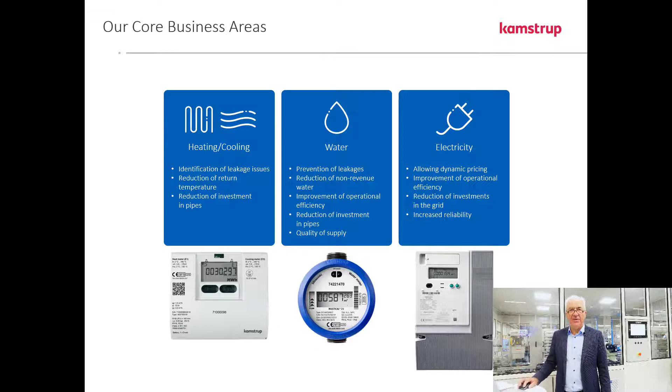I will in a moment briefly show our solution. A quick look at our locations: the Kamstrup solutions are sold to around 80 countries around the world. We are not global yet, but we are working on it, and we have reached 80 countries by now.

Out of these, we have our own offices in 23 locations in Europe, in the US, and also here in Asia, where we have offices in China, India, and Kuala Lumpur, with Kuala Lumpur being what we call a regional office for the Asia Pacific region. In all the remaining countries, we work with distributors.

You may, to a high extent, regard Kamstrup as a technology-based and very innovative company. We are altogether around 1,500 people, and we put a very strong effort into product development and innovation. I can mention that more than 300 people, over 20% of our colleagues, are working on innovation and R&D around the clock. This really plays a big role for us.

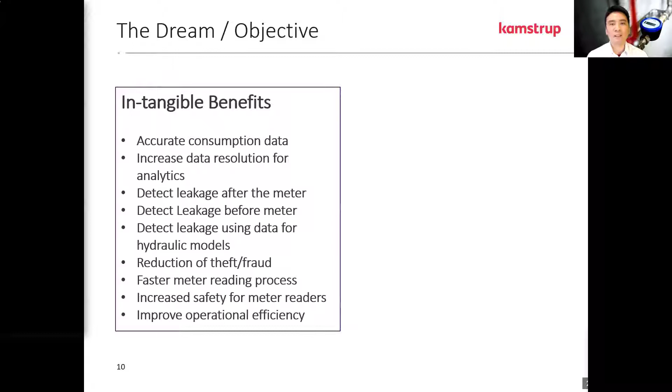It simply means that we can't measure the benefits upfront. So the approach for many utilities today is to try new things: put a module on a mechanical meter and have it transmit data once a day, or get hourly data and see what we do with it, or try a low-cost static design. The idea here is to manage cost. We want to go smart, and in order for it to pay for itself, it has to be low cost.

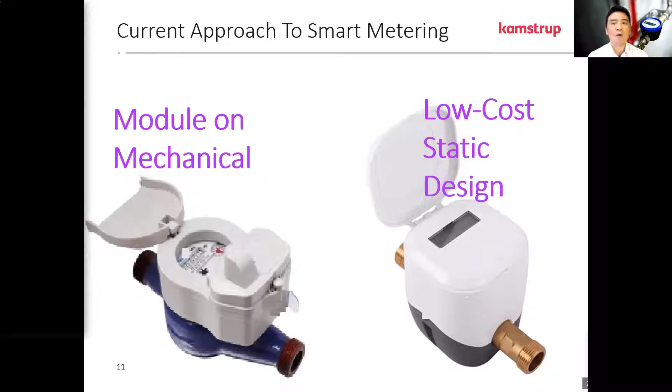That is the approach. However, my suggestion is different. We need an approach where we let smart metering pay for itself. Instead of limiting ourselves to a low technology or less reliable approach, let's use something more reliable, but have it pay for itself first. So how do we do it?

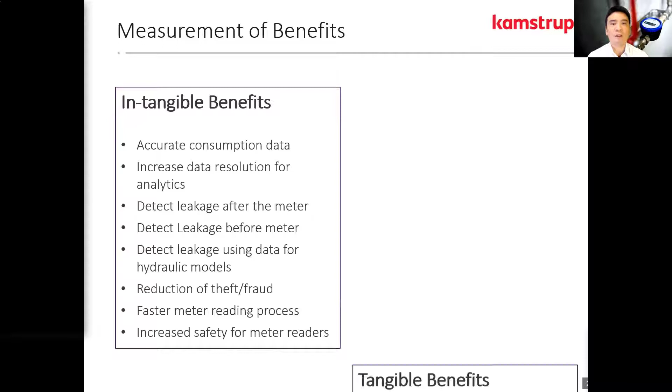Earlier I talked about the intangible benefit. Now let's focus on the tangible benefits first, meaning billing revenue increase. If we replace smart meters, we know workforce will be reduced, but that's not our key topic here. We are looking at the meter itself, so billing revenue increase.

Under billing revenue increase we have two segments. The first is non-measurable billing revenue increase, which has to do with elimination of estimated reads and prevention of meter tampering, but we don't know how much of that is happening, so we can't measure it upfront. But what we can measure upfront is, for example, replacement of stuck meters. If the meter is clearly stuck, you replace it and then look at the revenues, and you can tell how much revenue you've gained, or badly deteriorated meters, or resizing meters that are wrongly sized.

So let's focus on measurable billing revenue increase. What utilities have been doing to increase or protect revenue is to replace meters. This is done by all utilities. You have an existing meter, and as the accuracy falls and error increases, you replace the meter, and then it falls again, and you replace it again.

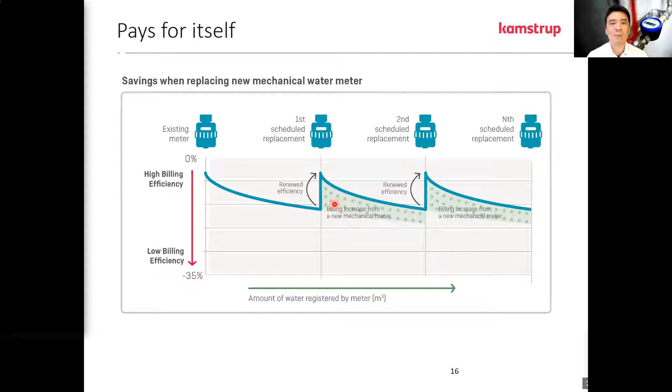This increase in error, or drop in efficiency, is mainly because of the deterioration of the mechanical component. As you use it, it fails. That's true of all mechanical components, not just meters alone, regardless of brand, type, and make of the meter.

So where does this information come from? You can search it all over, it's all over the internet. In this case I have two examples. The first is the performance analysis of aging single jet water meters, and then there's another article from Uganda touching on piston meters, the ones more frequently used in Malaysia, for example.

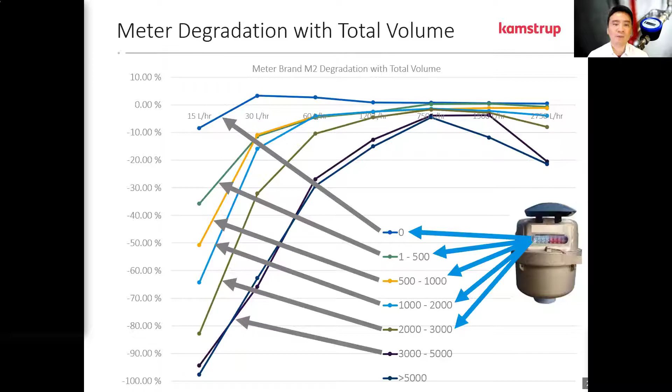You can see this is a new meter at zero, and this is a meter just started being used, about 1 to 500 meter cube, and so on. As the mileage increases, the worse it becomes. When I say worse, what do I mean?

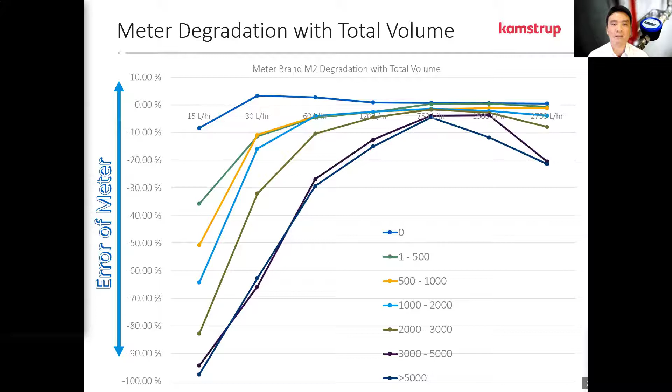If you look at the left side of the graph, that's the error, the percentage error on the meter. At the very bottom you see about 100% - negative 100% is hardly reading anything at that flow rate. When I say flow rate, look at the left and right chart's x-axis: on the left side you have 15 liters per hour, for example, that's the low flow for this meter. It's an R50 meter, so you can see how the efficiency really impacts the low flow of the meter.

So it makes even less sense if you buy a high dynamic ratio mechanical meter. Like if you go for R400 or R800, it hardly makes any sense.

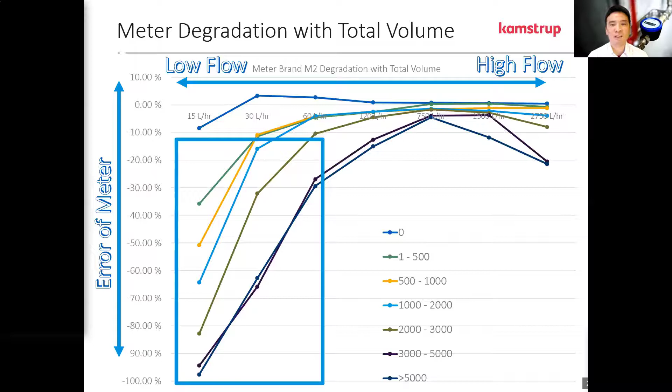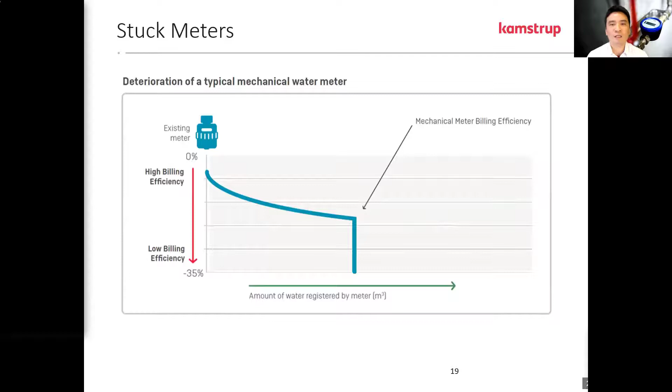You're lucky if the meter deteriorates normally. When I say lucky, I mean it could be worse - it could go from a certain percentage all the way down to negative 100. And these are stuck meters. I don't need a research paper to back this up - talk to any utility, they can tell you all about stuck meters. It happens all the time, and it has a lot to do with water quality in this case.

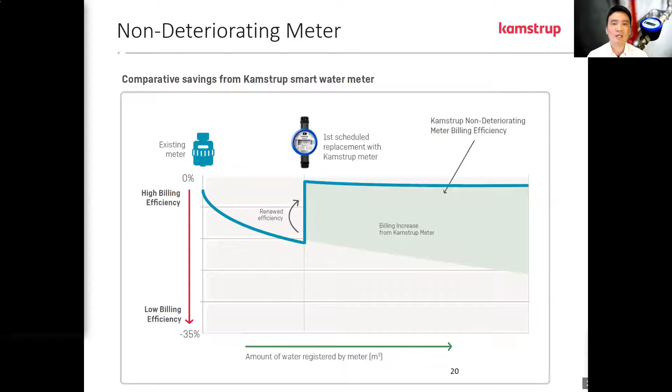Now, the idea here is to put in a non-deteriorating meter. If I replace a meter and it stays accurate throughout its lifetime, what's that lifetime? In Kamstrup's case, it would be 16 years. How do I reflect that compared with a mechanical meter? When I replace a mechanical meter, based on this particular research, the savings would be about 5%.

Now, if I can put in a non-deteriorating meter that stays accurate across the board, what does that mean? It means I replace upfront with one non-deteriorating meter, and then I don't have to replace any more until it dies - in our case, 16 years. So the savings just on the billing revenue protection side is 15%.

We're not suddenly jumping the bill and having customers go crazy about why it's so high. It's not that - we're simply providing a meter that does not deteriorate, that's all. It's not going to give you some fictitiously high reading. It's simply protecting your revenue over time, so you don't have to replace it afterwards.

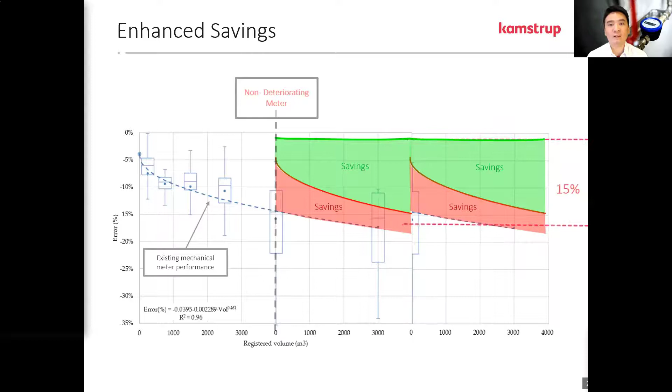And how do we know this is true? Well, if you look at Kamstrup's experience and application in Europe, many European countries require you to revalidate the meter after a number of years - in this case, about 6 to 7 years. There's this particular case where we have 1,308 meters being tested from the field.

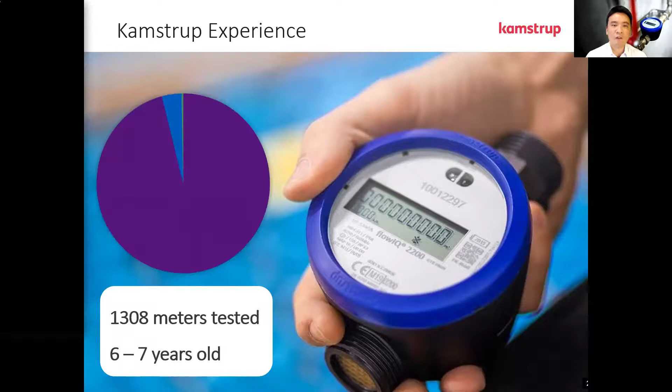This is from the customer - we are accredited to test meters, and they send it back to us for re-verification as required by law. So we retest it, and after those number of years, 96% falls within plus minus 2% error.

This is new meter territory - brand new, better than new in some cases, because our low flow is also plus minus 2. About 3.7% is double that, plus minus 4% error, which is acceptable overall. And if you look further, only 0.3% is out of spec, outside the plus minus 4%. I'm not talking about negative 100% like mechanical meters - it's just outside the plus minus 4%.

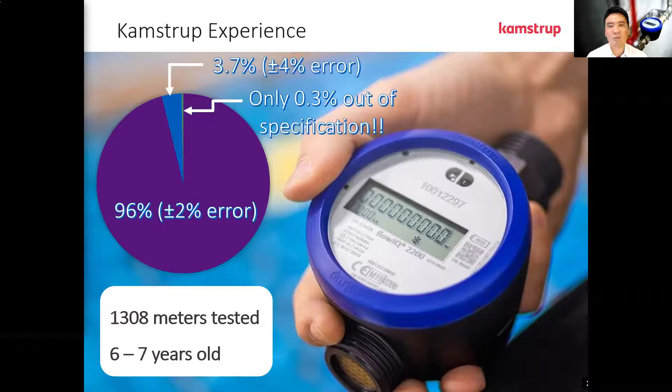So generally we say that our meters will last and be accurate for the whole 16 years of the battery life. We have experience on that.

So the enhanced savings - how we get a smart meter to pay for itself - is that first, you put in a smart meter that is robust, that can last the life on field, and doesn't have to be replaced over time, and then you have this high level of billing revenue protection. So that pays for itself. And then we can have meaningful, tangible and intangible benefits.

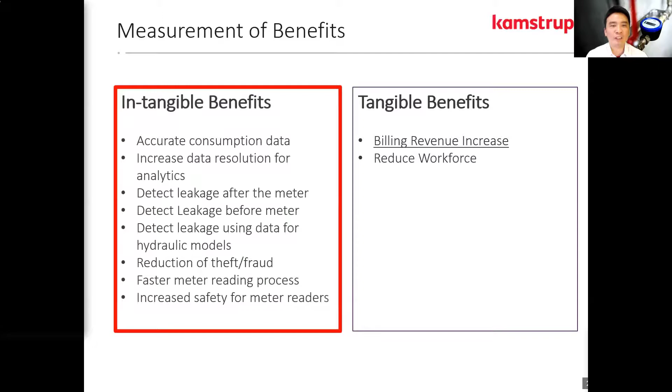We talked about intangible benefits earlier, like detecting leakages and using data for analytics. Now that can also be meaningful. It doesn't need to be just putting in a meter, gathering hourly data, and seeing what we do with it, or putting it into very robust software and running everything it can do. Let's be more specific - there are ways we can be more specific.

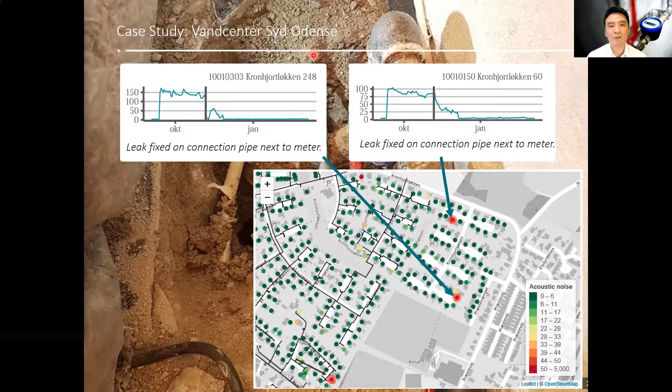Another case - this is a test from us. We wanted to know what happens if there's a leak in the main pipe. So that's the leak in the main pipe, and the houses around it are shown in these colors. It's relatively small, I apologize, but those are the acoustic readings you're getting. The further you are from the location, the lower the acoustic noise.

But it proves that we can hear it back all the way to the main pipe and then up to the neighbor's house. So there is a good and very useful application on smart meters. It has to do more than just sending meter reading data every hour, you know.

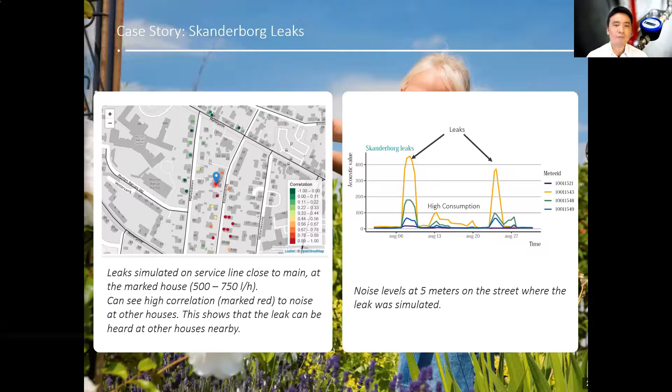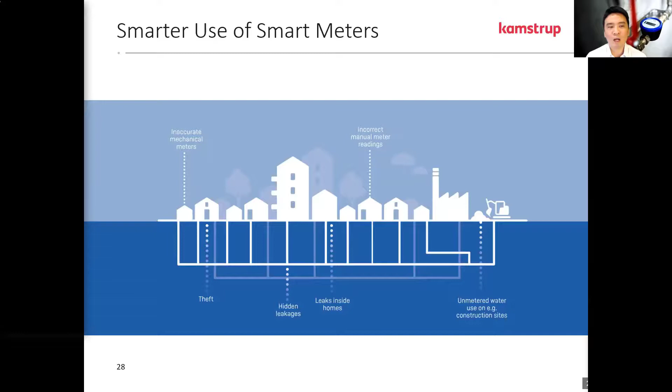And then if we look further, the use of smart meters has many benefits, right? Hidden leakages, we want to find them, unmetered metering points, unmetered usage, and so on. So how do we address those issues? Well, what we want to advocate also is a smarter use of smart meters. And how do we do that?

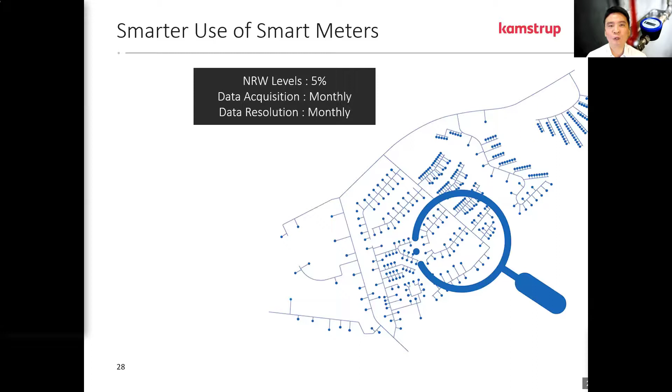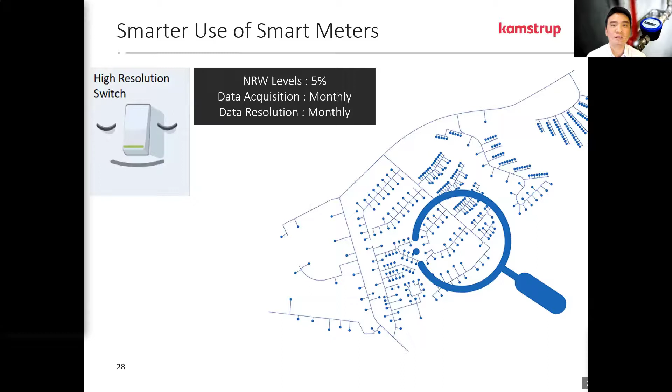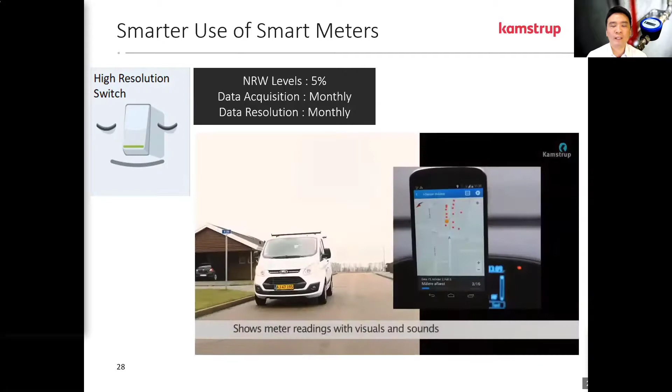For example, if we have a DMA where NRW levels are low, we can do monthly acquisition, data resolution can still be monthly. And in this case, what we say is the high resolution switch is turned off. We run things a little bit different, but as usual. For example, when the NRW levels are low, my meter reader will just drive by and read as usual. So I have already eliminated the issue with data accuracy, you know, issues of estimate reads and things like that.

Those are all eliminated. And then let's say you have an issue for this DMA and the NRW level has spiked. You are collecting data every month and this data is accurate, it's very timely data you use to measure NRW, and that NRW spiked to 15%. So you can continue your monthly acquisition of data, but you want it hourly now. You want hourly data resolution, meaning if I go there, I have 2 months of hourly data I can retrieve from the meter. Basically, the meter is a logger in this case.

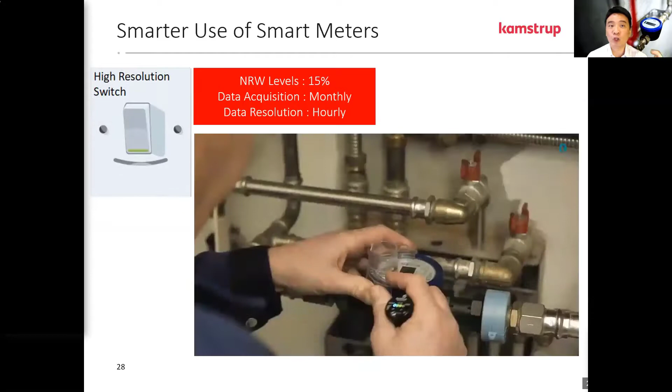So I switch on my high resolution, but the way I do it is my meter reader now will go to the site and extract this data from the meter, meter by meter, right? And I can use all this data. Maybe before my meter reader even extracts the 2 months of hourly data, what they can do is go out and install pressure loggers across the DMA.

Because when I combine pressure logging data and flow data, hydraulic models today can detect possible locations of leakage quite accurately. It balances the two information to find out where there are possible leakages. And then I can send my non-revenue water team to go have a look.

But think about it. The process that I have just mentioned, we can elevate this whole process into the meter reader. No more human resource issues of firing people by the masses. Socially, it is not good for the utility. And from a human resource perspective, it is also expensive. So let's retrain meter readers. Let's have them drive by and read those meters every month.

And then when there's an issue, let's empower the meter readers to become owners of the DMA. Let's have them go out to site and extract those hourly data, request data loggers, install them because they have the extra time now. Install them, collect the hourly data, send them to the hydraulic modeling team for analysis, and then bring that analysis to the non-revenue water team for site verification and then a repair.

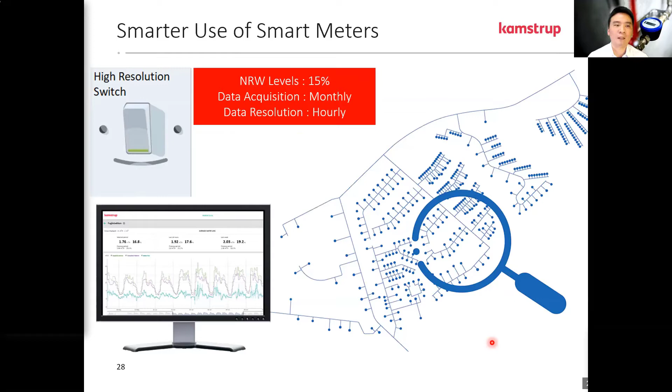Let's not get too deep into how I can extract hourly data from my meter from a very blind and very crude approach. Let's look at what we can do to maximize what we currently have and let smart meters be smart, not try to make a dumb meter smart instead, because that can be very costly and it doesn't get us anywhere.

And then if we look at the kind of analytics we can do, like for example here from Kamstrup, from analyzing the district, detecting leakage, recording incidents of where problems have occurred to find a trend in those incidents, many things can be done.

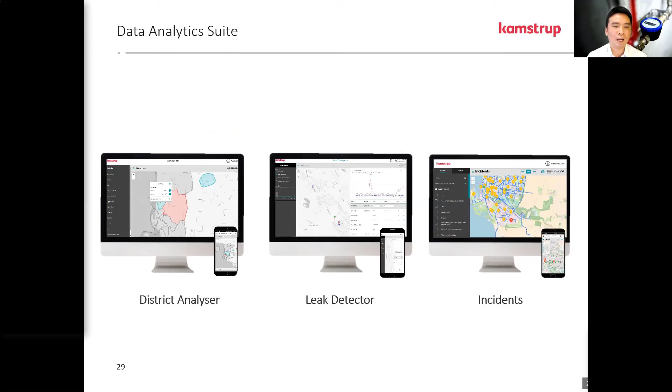This is our message. It is all about having a financially sustainable approach to smart metering, and then having a smart way to roll out real smart meters.